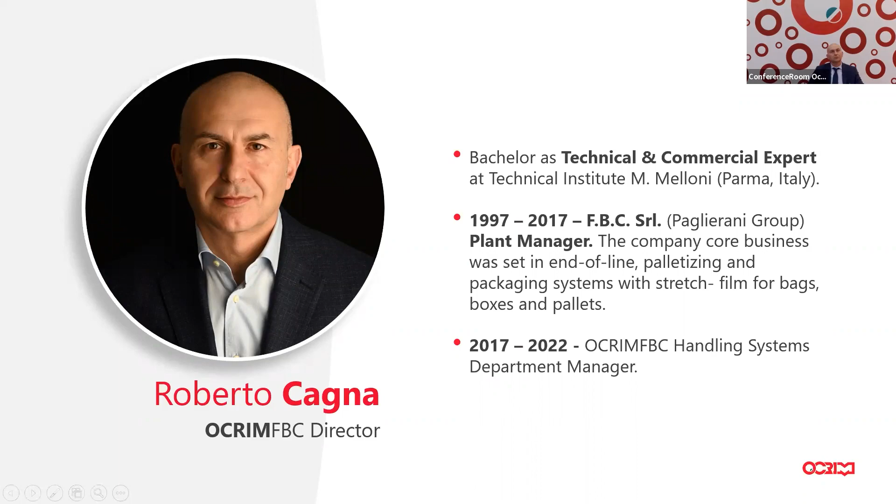Oggi parleremo di un argomento molto interessante: l'impianto Ocrim FBC, che si occupa di macchine fine linea, in settori diversificati, quali principalmente quello molitorio, quello food, quello del pet food, finanche quello chimico. Ma non sono io la persona adatta a parlarvi di questo. Vi parlerà infatti il nostro relatore Roberto Cagna, direttore di Ocrim FBC, che ha lavorato nell'impianto Paglierani dal '97 al 2017 come plant manager e oggi è direttore di Ocrim FBC. Vi lascio al suo racconto. Roberto, benvenuto, buon pomeriggio, la parola.

This being said, let me start with the title of this webinar: first line, end of the line. It's a pun, we are playing with words, and it sounds like a slogan. I like it so much because in just a few words it represents so many things. First of all, it sounds like an announcement saying Ocrim is here, we have the end-of-line machines, our own end of lines, so everything is done or made in-house. This is something different versus all the other international players on the market. Of course they have similar products, but commercial agreements in those cases are not done on a long-term basis, and sometimes the negotiations with them have been very long. Problems have arisen, and then there have been, again, problems on the customer side. So the fact of having 100% in Ocrim, or in-house production, this is an advantage, a plus for our customer base.

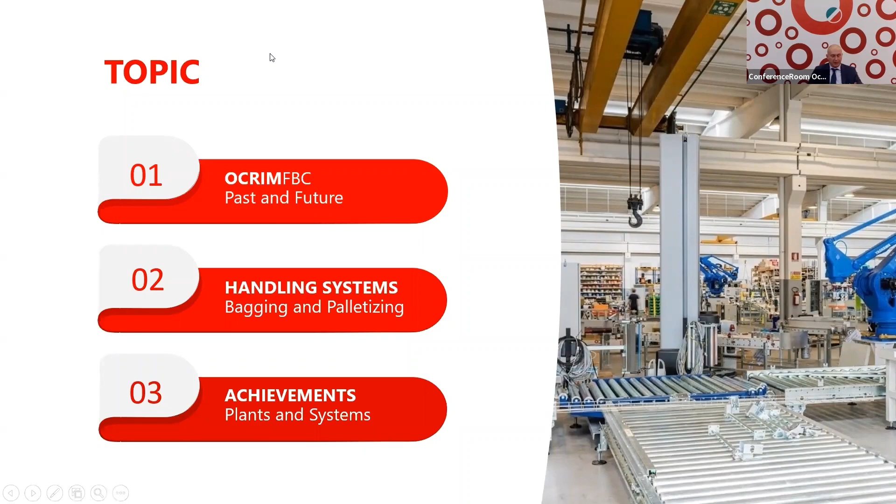Now, first line - we've been there forever. We are an acknowledged international player building machines and plants for the milling industry. This is our core business, making sure our customers can make flour. End of line means packaging of the line, so primary packaging - we have bags, different types of bags, and sometimes filled bags. But I'm also talking about the so-called secondary packaging, putting all the packs in a very specific sequence on pallets so that logistic platforms can easily transport or handle pallets - basically palletizing machines. And we also have the heat shrink wrappers. So this is basically in a nutshell all what we do today.

So today's webinar is based on three key bullets. I need to tell you who we are, some background, but also something about the future. This is very important for me because I'm one of the witnesses of the evolution of this department in Ocrim, and I will give you details about this. Second bullet, what we do - I will show you our products and what you have to use them for. Last but not least, I will share with you some of the plants made. You will see some pictures, and I will also give you some figures or numbers, where these machines have been sold.

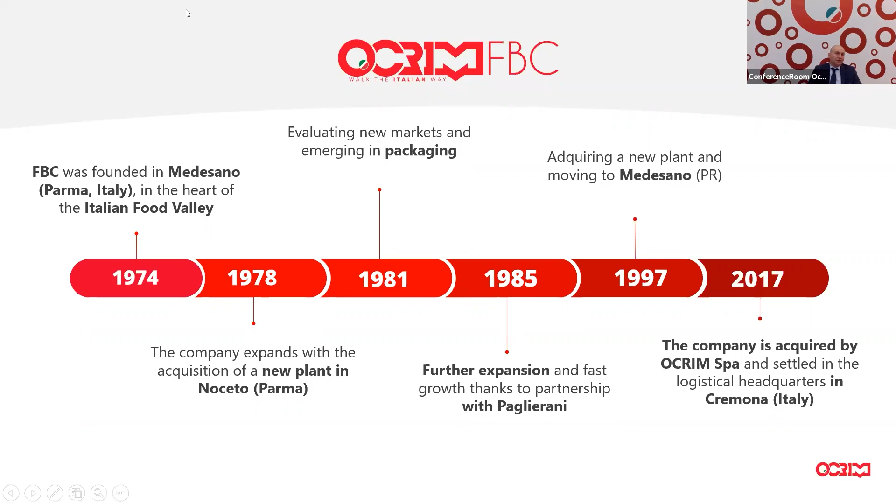Once again, there's been a great evolution, and then, well, we met, so to say, Ocrim. Ocrim decided to take over the manufacturing site and moving it to Cremona. So, well, this step was fundamental. That was 4 years ago, so 2017, and I have to say that the business unit merged into the Ocrim manufacturing site.

So this is what we found. We found a different organization versus FBC. Of course, Ocrim was much, much bigger than FBC. So that was a so-called fertile ground in order to develop new ideas. And I have to say that the context here is very well organized. It is highly professional, top-skilled employees, and a cutting-edge system.

Once again, very high skills from operators. Once again, a very high level of managerial attitude, professionalism, and a complete supply chain. That was different, and especially that there was much better quality than the one we had in Parma.

This means that we went through sort of a restyling of our machines. So we had to redesign our machines and fit them into the Ocrim production context. Now, of course, well, it has taken a while, so it has taken some time, but all of this was fruitful. We've been able to redesign machines. At the same time, our technicians, our designers have been able to express all of their skills.

Now, apart from the so-called operating context, this is also what we found in Cremona, a very, very strong, let's say, identity of the people working here. There's a strong sense of belonging to the local community. These values are typical of Ocrim.

So once again, Ocrim means Cremona. It's a sort of a dualism. It's a sort of a twin agreement. We have adopted, I mean, the same livery, so grey and red. These are the two Ocrim colors, especially for our machines. This is our standard colors. And we have borrowed, I mean, the colors typical of the flag of the city of Cremona.

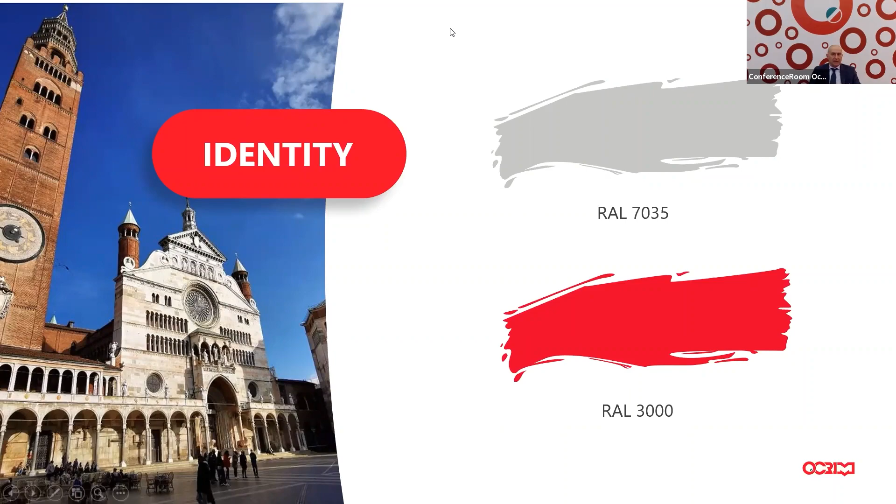I may say that this means passion and rigor. So the two key elements, the two key drivers for Ocrim and for all what we do here in the company. Now, let me be a little bit more specific on what we do in terms of end of line.

So we make machines which are able to handle totally automatically different types of packs. Now, when I say packs, I mean sacks. So, of course, if this is milling or flour, something like, well, from 10 to 25 kilos. We also have bags. Now, bags are smaller than sacks, but this is what you can find in large retailers, on the shelves for end customers.

We also have the bundles. Now, bundles are basically heat shrink plastic packs. They contain small bags. You can also have boxes. You can have very simple so-called American cardboard boxes. In some cases, we have a cover or a lid. You can also have a stand or a display.

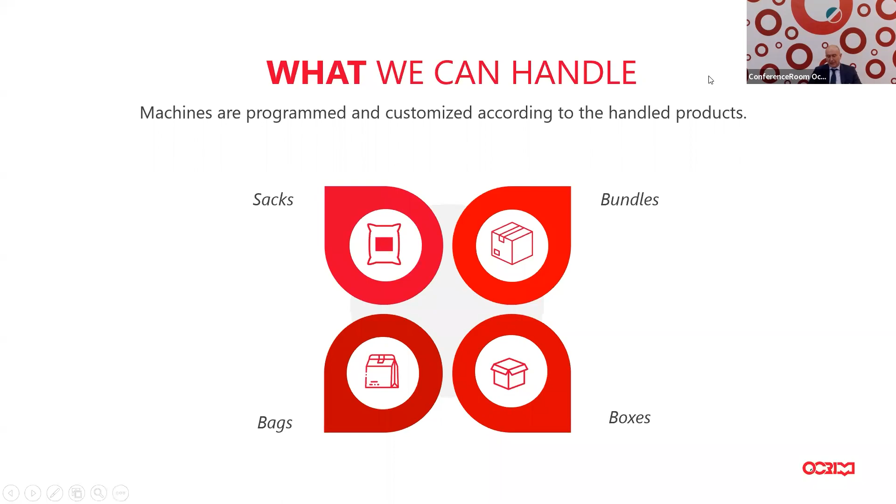So it depends on the marketing effort you want to have in your commercial lines. So it depends on your marketing decisions. So in a nutshell, these are the four types of materials that we handle. These are our key industries. Of course, the milling industry is playing the lion's share.

And of course, we have to also create end-of-line machines in Ocrim. Anyway, the FBC story means that we've become an important player in other diversified sectors.

I will show you some numbers. Of course, we have relationships with the food industry. We also have the concrete or cement makers, different types of industry, and mining, sugar, and then salt, sugar. Once again, as I said before, extraction or mining industry, for example, gravel and stones, and so on and so forth.

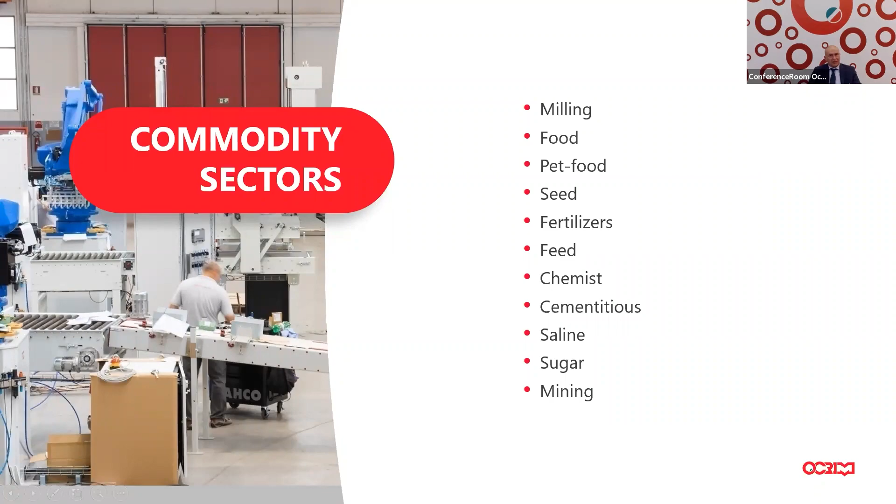So I may say that basically everything can be contained in the bag. So once again, we have so many diversified sectors we cooperate with. Let me also share with you...

How we've been able to penetrate those sectors. Milling, once again, it's absolutely number one, and then concrete makers. Of course, here you have lime, you have cement, you have concrete, you have chalk, you have pre-mixers in many different shapes and forms. What is important is that these powders can be contained into the bags or sacks.

I'm talking about powder, but I'm also talking about pellets. And then moving to the left side of the pie, you have animal feed products. And this is a booming industry. Fertilizers, plastics, chemicals, different types of chemicals, and then, as I said before, sugar and seeds.

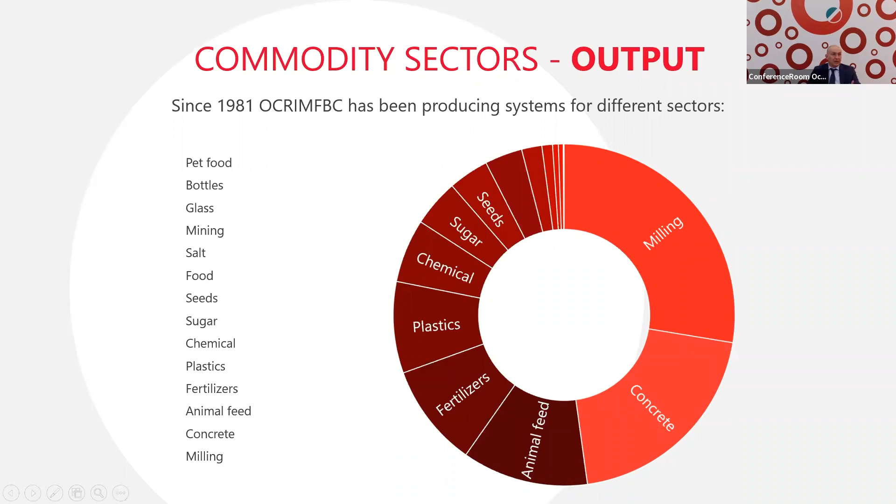Every sector has some special features. Of course, the bag is not airproof, so you will see some powder on the bags. You can personalize or customize the product so that it is compliant with regulation and, especially, lasting long. This means the plant can really work for a long time.

Okay, after talking about what we have done and what our current state of things is, let's now talk about the mission. So what we are doing and what for.

Now, of course, high technology. When I say high technology, I mean seamless, relentless search for new materials which can be useful for our plants. The plants have to work and operate at best. It has to meet customer needs.

We believe so much in research and development, where we have dozens of top skilled technicians and engineers. They offer you their experience in order to customize products. We usually have modular projects, then we standardize or industrialize the products. Of course, we can customize the product for every single customer, depending on the needs of end users.

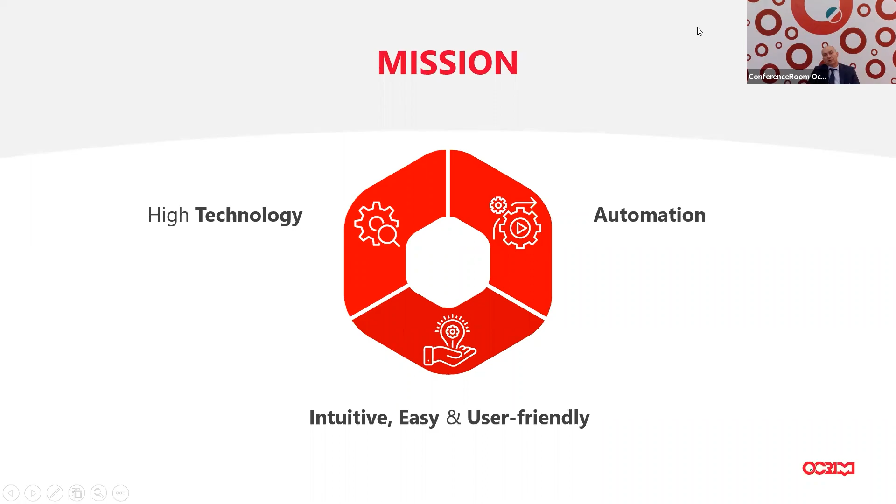I have to say that when transferring the company, we've also transferred most employees - technicians, engineers, mechanics, and after sales professionals. So once again, it's a legacy that we have brought to Cremona, and they are now teaching young talents.

Let me continue the description of this business unit. We do not only make machines - that would maybe not be enough. We also sell services to customers. I think services are important, and this means we test the machine together with the customers.

Sometimes the customer trusts us, so we can skip this phase, but yes, we do have some testing, in-house testing in our company in Cremona. In some cases, we can also use the final product of the customer - for example, we test the packaging systems. We can also have the product coming from secondary plants, and the machine will be able to take care of that product.

And then, of course, we also travel a lot, so we install the machines on site. I think this is fundamental. Installation and training, I guess these are fundamental elements or drivers if you really want to strengthen the relationship with customers.

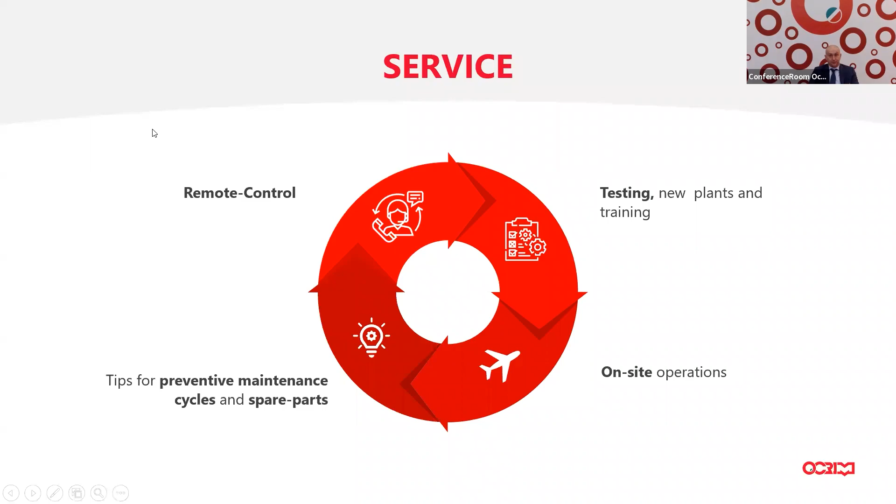In other cases, because of corporate policies, there is no open channel, so to say, and then everything is on demand - as soon as they need a correction, a new step in the program, or maybe minor maintenance, because maybe the sizes of the box are different. They need a new box, and if possible, we do this remotely. In some cases, we work on site. So once again, we save a lot of time and money when we do off-site or remote maintenance.

This is my second subject today. As I said before, I will be talking about new products. We have once again the wrapping machines and the bagging machines.

One of those products is not totally made inside Ocrim, but we have a sister company, Pagliarani, taking care of some of these machines. Pagliarani was incorporated 80 years ago, and they've been making weighing machines and bagging machines for 80 years. I'm sure many of you are familiar with the Pagliarani brand, just like Ocrim.

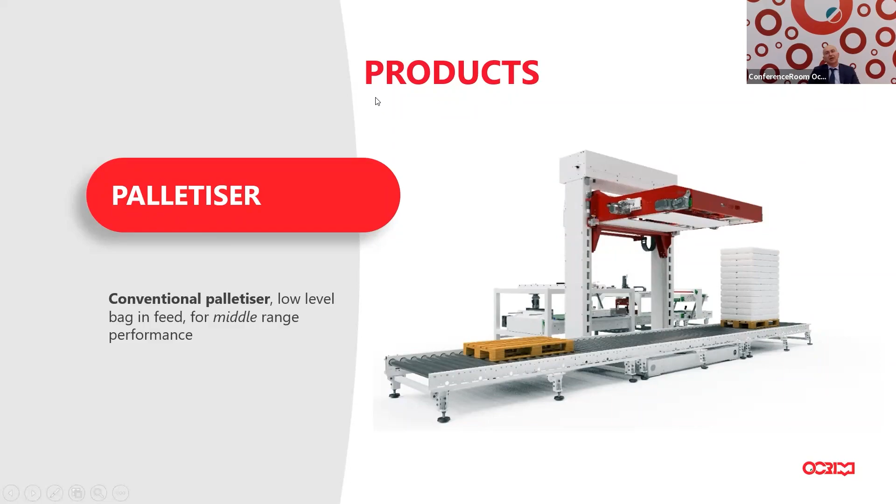You can see here a palletizer. The conventional palletizer has low, medium, and also middle to high production options. The first one is a conventional palletizer with a low-level bag infeed, 1 meter high. In terms of space, this is quite small. We have machines belonging to the basic level, but this is modular, so you can really meet the needs of expanding the range or making the machine bigger thanks to accessories and additional devices. This means you have superior performance without necessarily having to totally replace the machine.

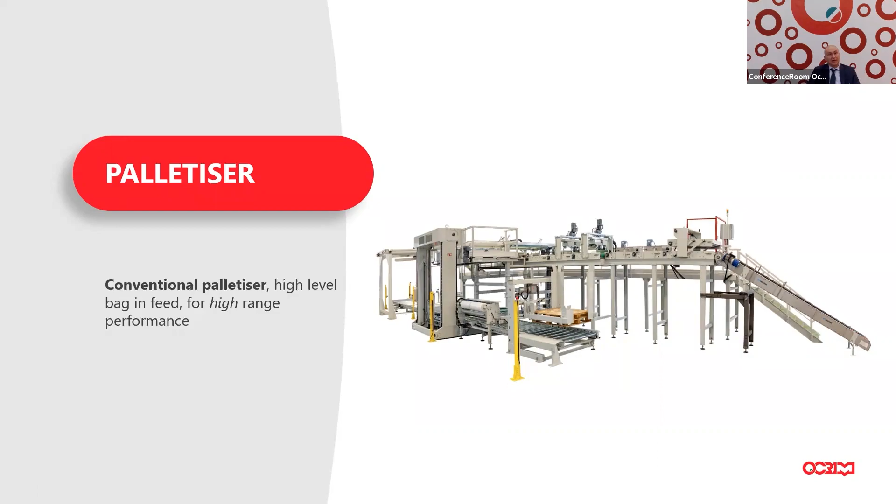We also have high performance machines. This is, once again, a conventional palletizer. When I say conventional, I mean there are special electromechanical devices, or even adapters, to handle the bags or sacks, and then put them onto wooden or plastic pallets. This allows us to have a perfectly squared pallet, so in terms of look but also stability, we can reach a very high quality.

We also have the robotic palletizers sector. Here we have two specific lines. The first one is an anthropomorphic robot. This is 100% made in Ocrim - the frame, all of the assembly of the electrical part, and of course, the logics and software programs.

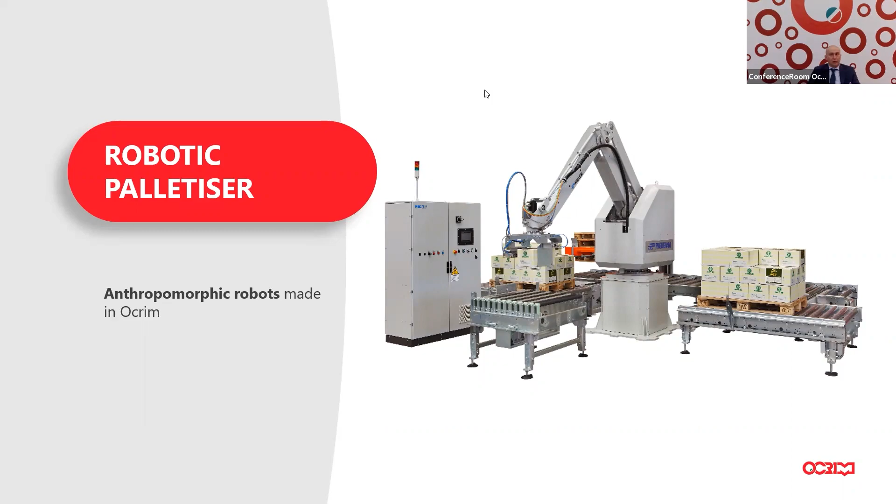I'm sure your question is, why do you make your own robots? Well, for a very simple reason - this is part of our DNA. We would like to have as many machines as possible made in-house, because this means we know the product and we can help the customer with maintenance and assistance. Many customers like this so much because they know we are a reliable partner.

This type of machine meets many different needs. We have just one single size, but in some cases you have more complex scenarios. If the customer decides to have an industrial robot, in that case, inside our line, we integrate anthropomorphous industrial robots, different types and different sizes, purchased by companies from around the world.

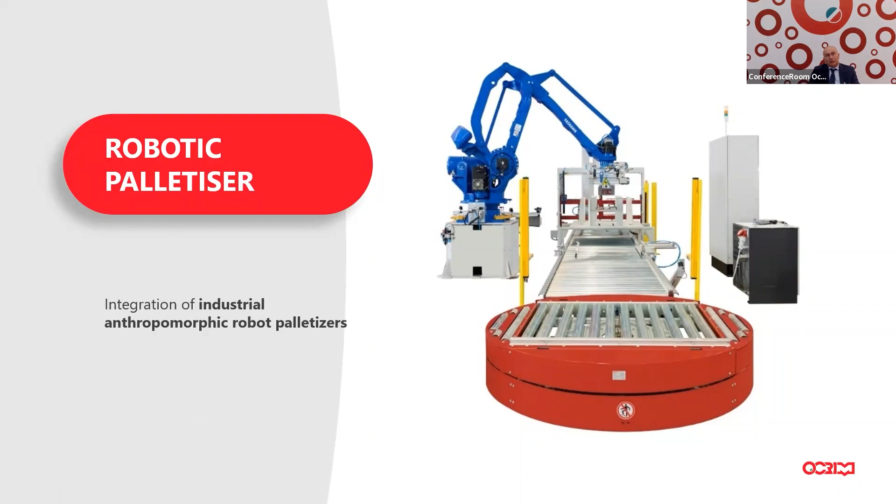This is all what they do, so they can count on many different products, different sizes, different features, and different performances. We can choose from all of those alternatives and integrate it into our conveying line, so that the entire product is Ocrim made.

Around 10 years ago, we were pioneers in combining the typical conventional palletizer capabilities with robotized palletizers. This means we have a perfect mix in terms of flexibility and palletization results at a very high level, especially in cases where there is partial overlapping of the bag, or faulty filling levels - which you see in the milling industry and also in the animal feed industry.

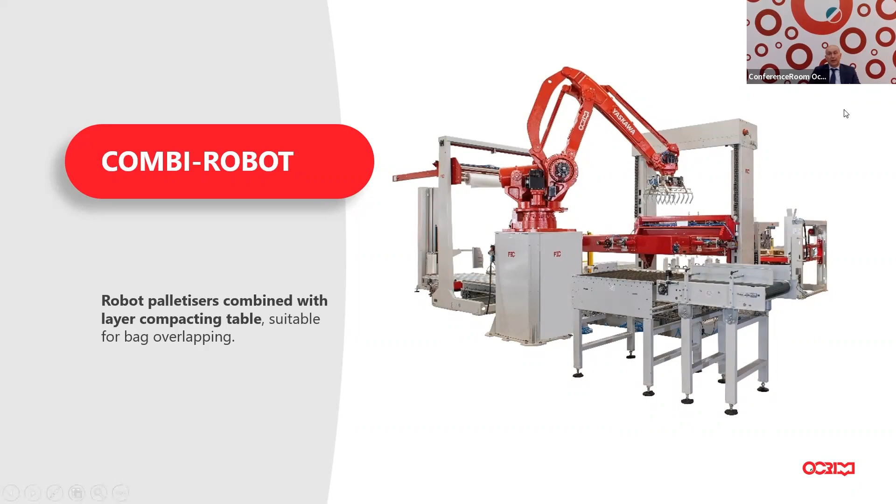Let me continue with other machines. We are going very close to the end of the line, following this logical thread. This is basically pallet protection with the use of stretch film. We have different machines, different models. Basically we have one wrapper you can see here with a rotating table, mid-performance.

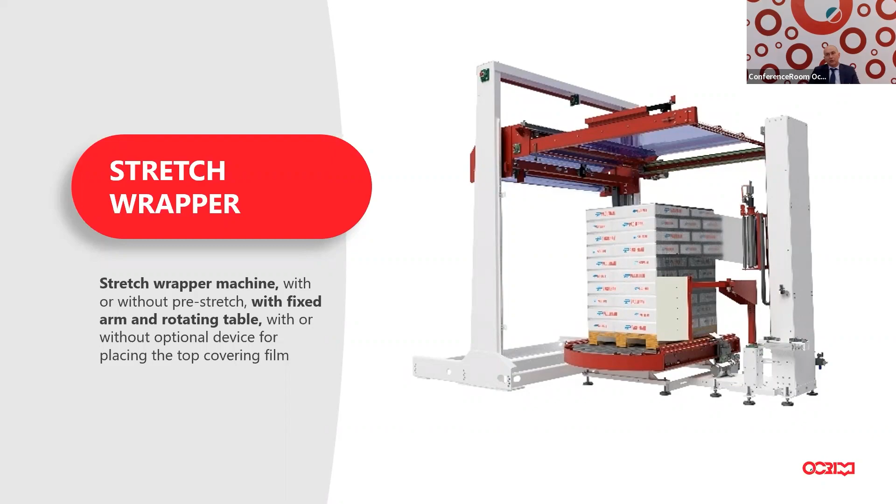I will skip the main features - there may be other meetings to talk about this. With or without the use of the management unit, for example with pre-stretching, we can also get the top cover or lid. This is another option, great if you want to protect the load on the top. In this case, the customer is able to store the product internally or externally, waiting to send it to customer distribution platforms or logistics.

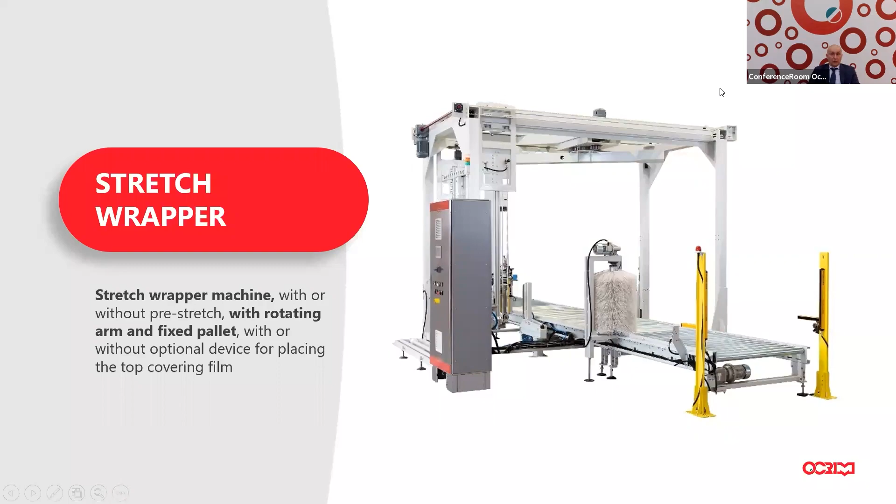There's another wrapping machine with a rotating arm. In this case, performance is higher, better. It is more complex, larger, so it takes more space on the floor, but with specific features - with or without pre-stretch, with or without the top lid. We also have another machine I'd like to show you, which is the stretch hood, a cold stretch hood.

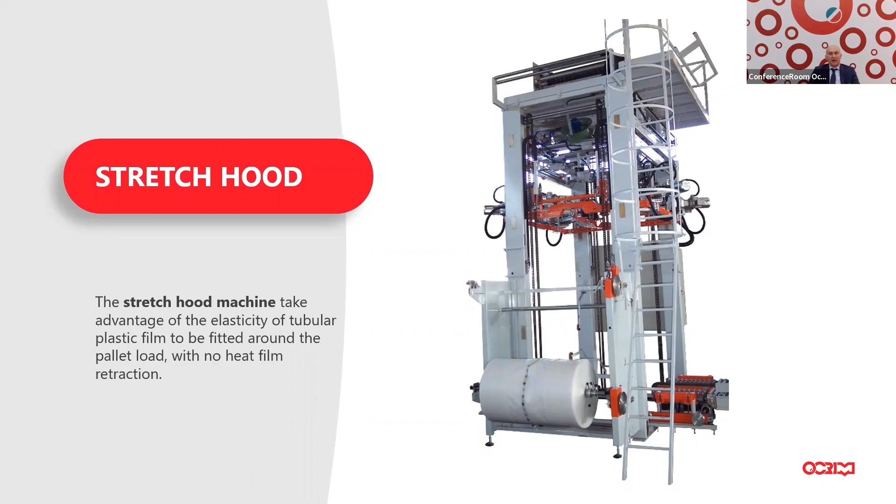Now, as you can see here, we have a tubular roll. In this case, we can take advantage of the elasticity or stretchability of the plastic film. So there's a mechanical cold system. You put the film, or lid as we say, on the pallet. In this case, you don't have to use heat shrink technology and, of course, plenty of energy. Also, in terms of safety, there may be issues. So the so-called cold process is, in my opinion, the best solution to spend less money while the result is still guaranteed in terms of pallet protection. These are the main machines available.

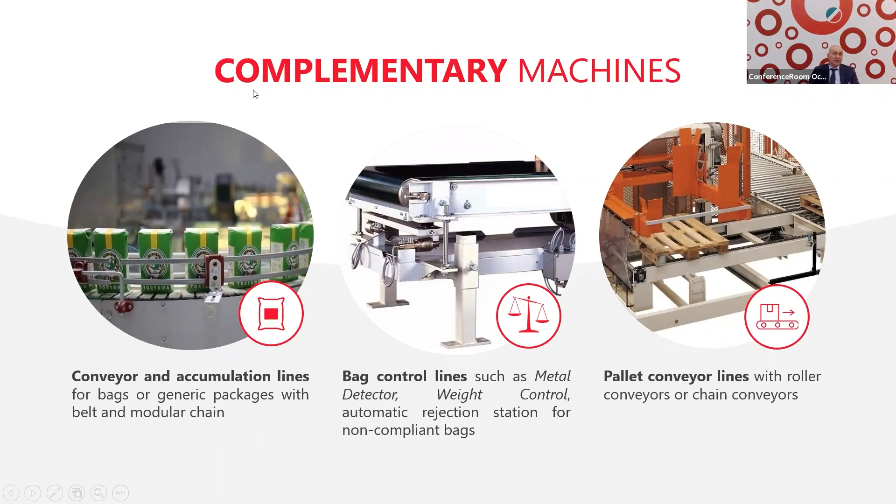We have the possibility to design our lines depending on how much room the customer has - big rooms, small rooms, pillars, columns, hurdles, obstacles. We have to be very flexible in giving the right conveying lines for empty or full pallets. So traditional roller transport systems, chain conveyors, and pallet rotation, once again with rollers or chains.

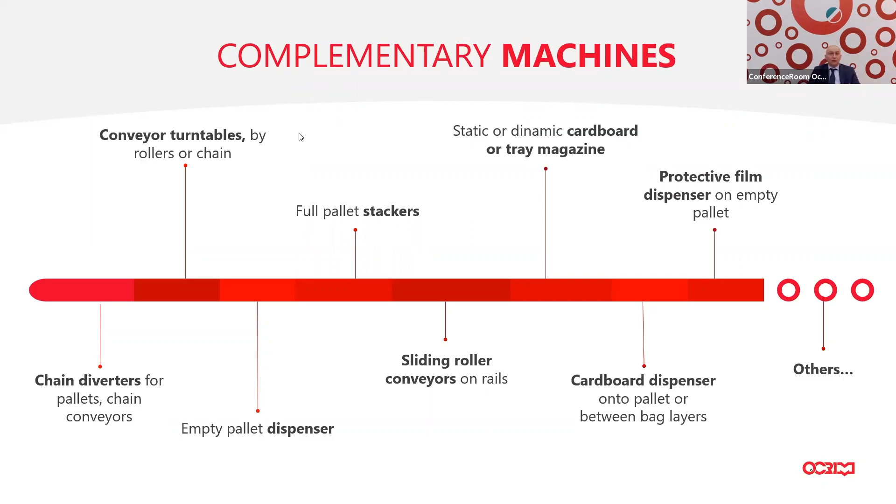We also have plenty of other products because you may be even more demanding. For example, you may want to protect the empty pallets - we can use plastic or wooden pallets, plastic film foil for protection purposes, or cardboard inserts with or without stapling, so you avoid cross-contamination and humidity if pallets are stored outdoor. You may also have other optional accessories to further improve pallet stability if you have special palletizing schemes. In this case, we have different layers of cardboard that can be used during palletization. This increases pallet stability and removes any doubt or problem in terms of logistics.

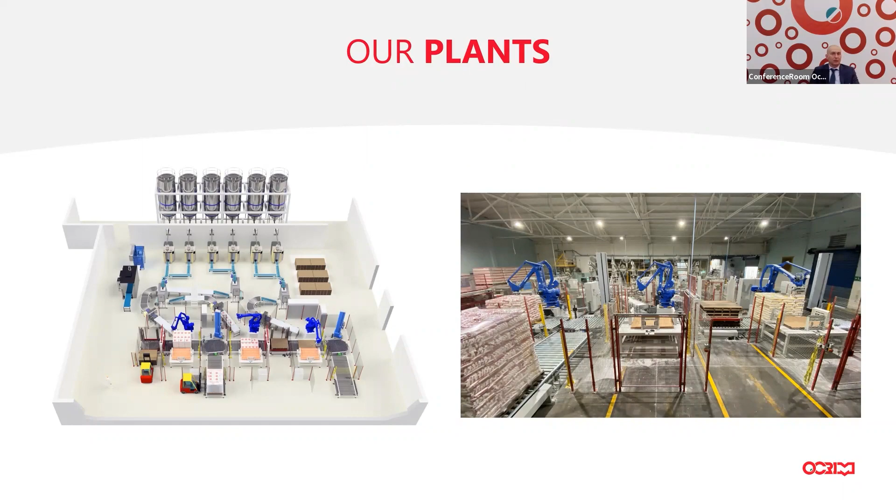This is a unique facility because in this case we have to handle 25 bags, 1 pound each, so 25 pounds - this is a bundle, and it's impalpable soft flour. It's difficult to handle with traditional grippers, so we developed this very special gripper. It is 100% reliable in robotized palletization, and you can see the result here in the picture, because what we get is perfectly squared pallets.

This is another slide similar to the previous one. You can see here the robot and the robotized system. This means the rotation of the bag is done by the robot, and the traditional machine then squeezes, compacts, and presses layer after layer, every layer you have on the pallet, so as to have a beautiful pallet, but also a compact one.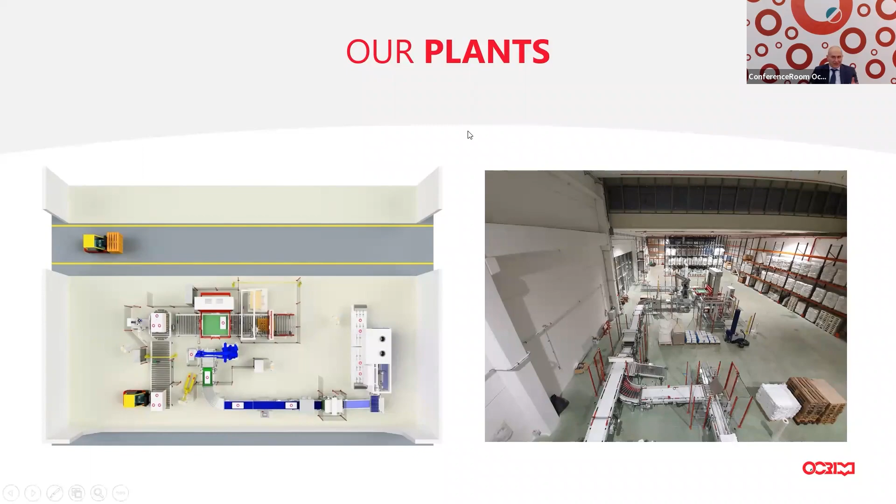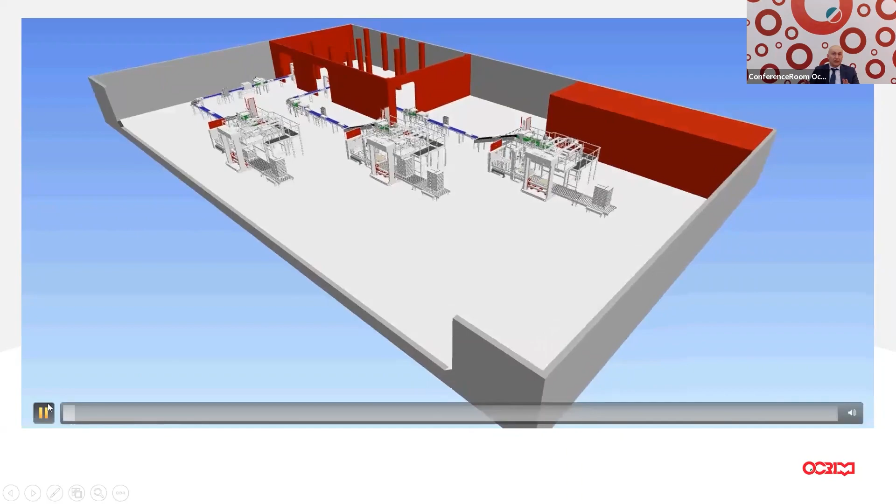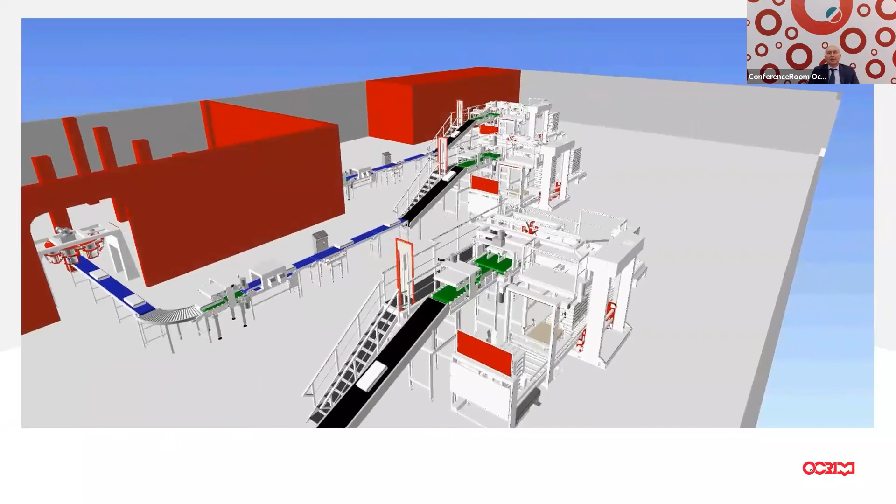So we also made another project that you can see here. These are presentations we share with our customers to make sure they see or understand how the plant will be made. Here we have 3 top feed systems. The bag conveyor lines also contain control systems - weight control, metal detector, and automatic sack deselection or discard system. In this case, we can go up to 1,800 bags per hour each. This means a high level of production for the customer - you don't need many operators taking care of these machines, so there's almost no manual palletization, and once again, a very short return on investment time.

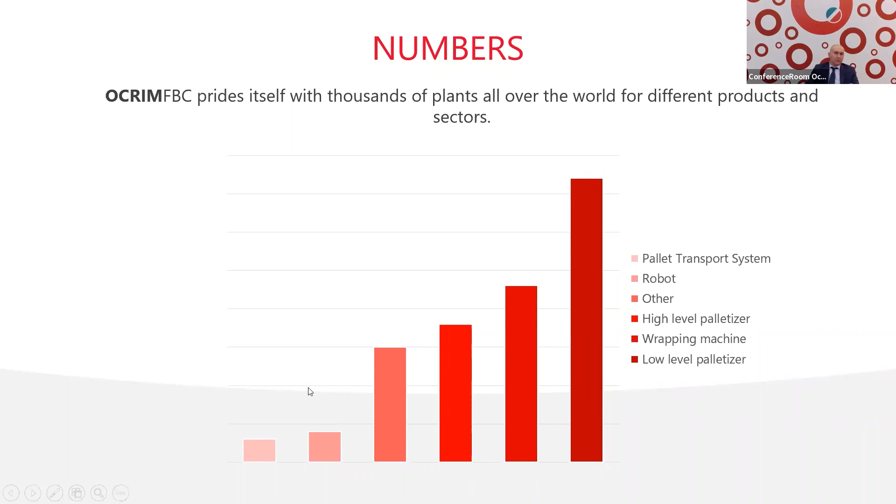Let me tell you where we sold them. Well, in general, all over the world, mainly in Europe, because, of course, it's easier for us from the commercial point of view, but we also sell them in the rest of the world. Other continents have a minor share, but we have around 1,700 plants worldwide.

1,700 lines, so it's much more than one machine. In the line, you have the palletizer and the wrapping machines, so potentially it's two machines. It's much more than 2,000 units we made, sold in Europe, but also in the rest of the world.

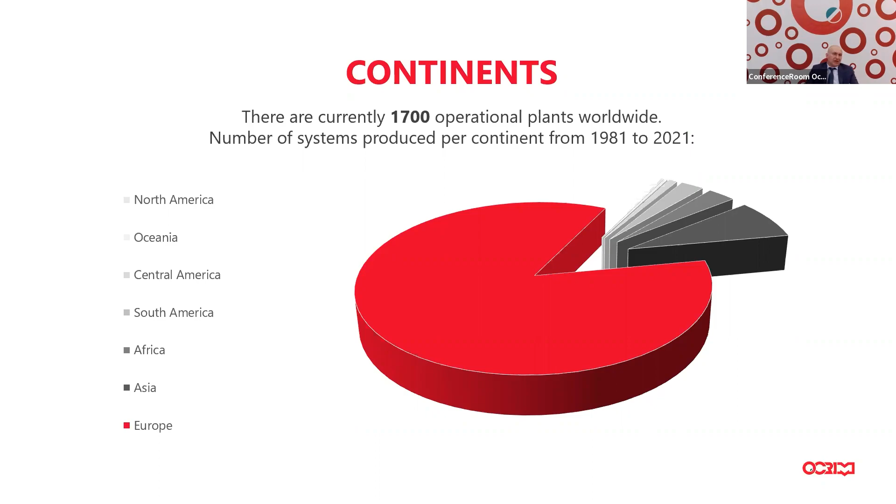I'll have to say that thanks to the current policy from Ocrim, we are able to further increase export flows by taking advantage of the presence of Ocrim all over the planet.

So let me summarize briefly what I have presented, just some highlights. We make plants for the milling industry, so flour production, but also many other sectors. This means that for every single customer, we have to decide to create the best machine that best fits customers' needs. There's dedicated research and development, not just something to improve the machine, but our R&D efforts are based on customizing machines for every single customer.

Then we make it inside our company from A to Z, because we have a long manufacturing chain. We process metal, then we go to carpentry, frame, assembly, cables. We assemble also the electric cables. This is what we do. Once again, there is basically no outsourcing. I guess this is important. Electric panels, cabinets, software programs, everything is done here. So we retain the ownership, and we also have the know-how of all of these systems or software programs.

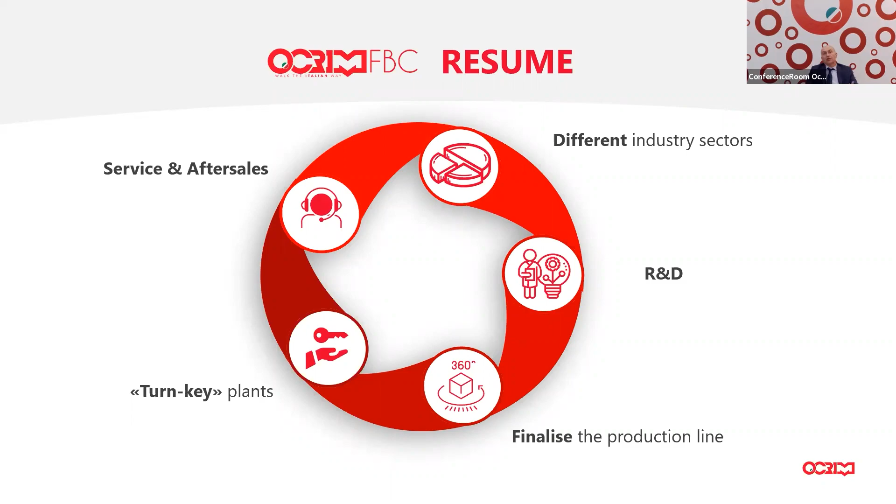Apart from this, we also offer after-sales services or in general assistance. So we take care of the customer, we give them, let's say, the key of the machine, but then the relationship continues. If required, we are always there to give them the right tools and to, once again, help them year after year.

So in a nutshell, we talked about services. I told you what we do, and you can see here a short list of the benefits for our customers. So of course, we customize machines and services. Once again, the products are bespoke and in compliance with customer needs.

It's very easy to install. We save time in terms of installation because everything is pre-scheduled and pre-programmed. Everything is done so as to avoid, let's say, hiccups. This may happen sometimes, we don't want them. And we want to allow the customer to use the line as quickly as possible after installation.

Automation means integrating our lines with the customer's supply chain or production chain. So our machines, so to say, have to talk to the machines of the customers, in those cases where we find machines from other companies, of course, we cannot interrupt the communication flow. So I'm talking about IoT or Industry 4.0.

All of this is so important today because we know that this depends basically on the exchange of data points, data sets, and the communication flows between different types of machines. So we also have remote control, as I said before, so we can very quickly give assistance with very high savings for our customers. And again, this is another service which is in high demand.

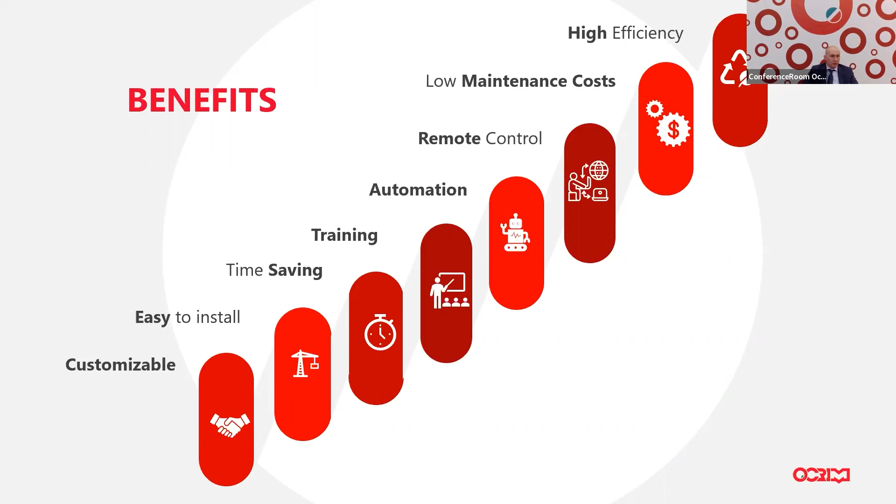This means low maintenance costs. The more they are efficient, the less they are expensive. All of this translates into a high yield and efficiency. Downtime is kept to a minimum. And I have to say that basically we have customer satisfaction and plenty of business for our customers.

Now, I hope you have the same feeling. And I'd like to specify that our commercial network, so our salespeople, are at your disposal for any inquiry, demand, or needs. It's a pleasure to serve you. Thank you so much for your attention.